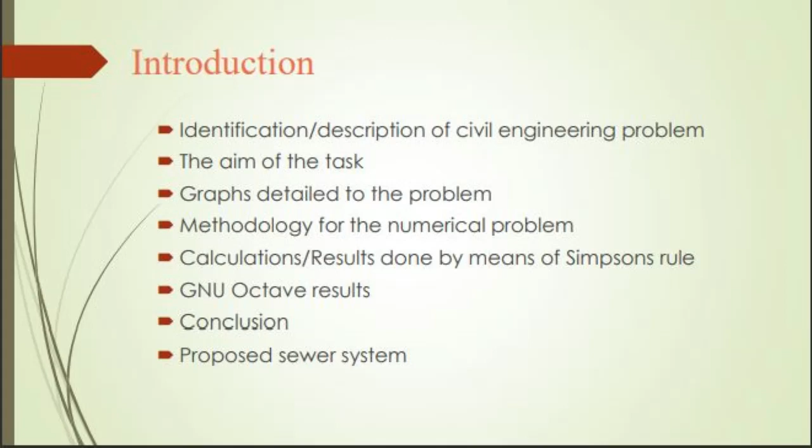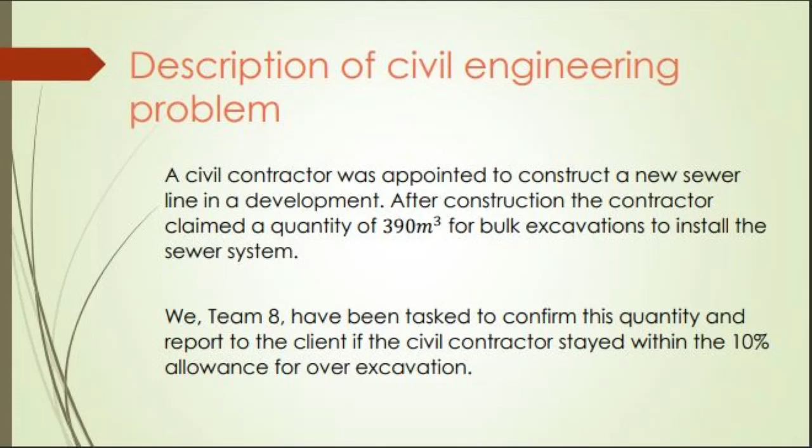The description of the civil engineering problem: a civil contractor was appointed to construct a new sewer line in the development. After construction, the contractor claimed a quantity of 390 for bulk excavation to install the sewer line. As Team 8, we have been tasked to confirm this quantity and report to the client if the contractor stayed within the 10% allowance for over excavation.

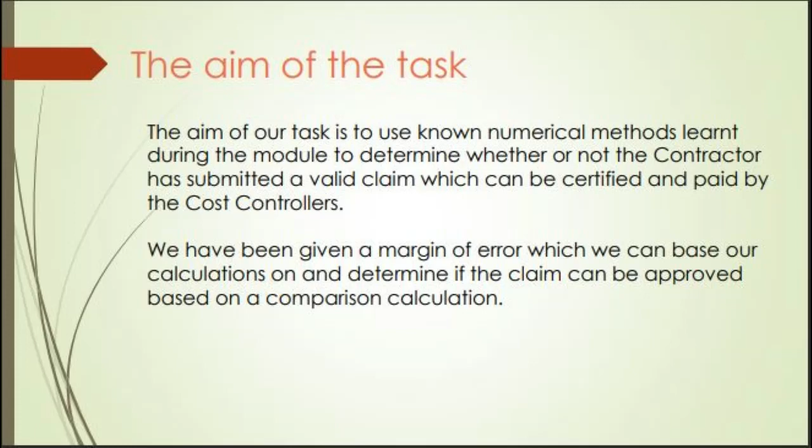This was known as Simpson's rule, used to obtain a slightly more accurate quantity of excavations, so 5-meter intervals were appropriate. The green line indicates the sewer invert level, laid at the minimum slope for adequate drainage, and the difference between the two shall be taken as the depth, used to calculate the area using Simpson's rule.

My contribution to the group was to design the sewer with the invert levels, to create a surface and obtain all the existing ground levels at each interval, to lay the pipe according to cover levels and pipe IDs, and to tie into the existing manhole invert level.

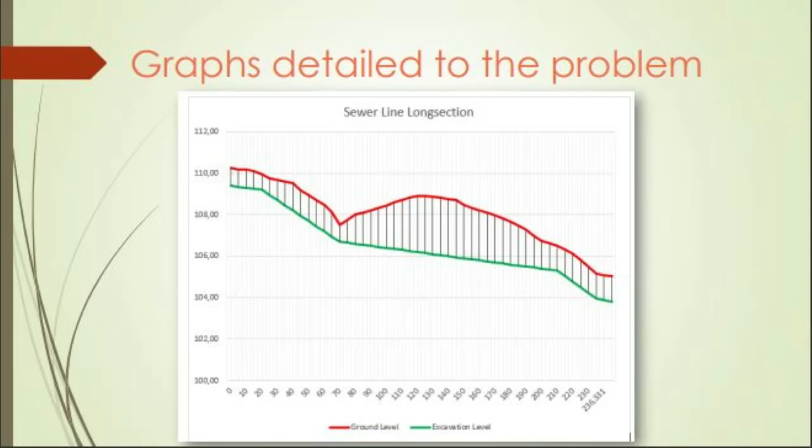This data was then used to obtain the depths, which I used to calculate Simpson's rule manually, and I also used an online tool to confirm all the answers. Using these answers, the area was multiplied by the trench width to obtain the total volume.

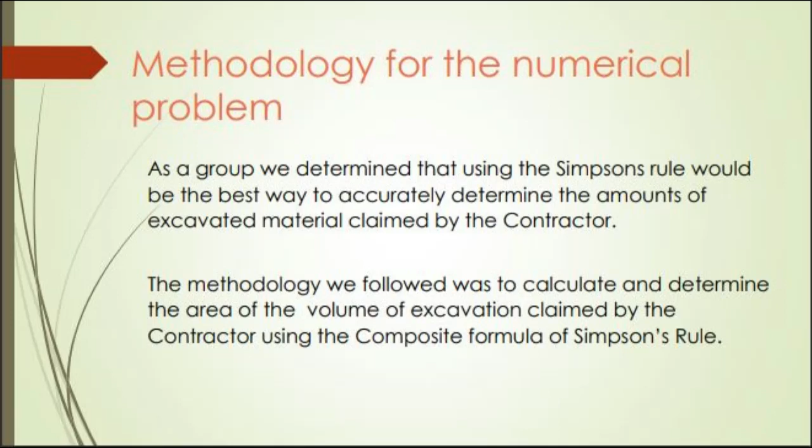We used Simpson's rule to calculate the excavated volume of 360.139, and this volume was calculated from chainage 0 to chainage 237.661. Compared to the contractor's claimed excavated volume of 390, this leaves a relative error of 8.29%. Even though the contractor's volume is higher than our calculated volume, the error is less than 10%. Therefore, the contractor can be paid out for the volume excavated.

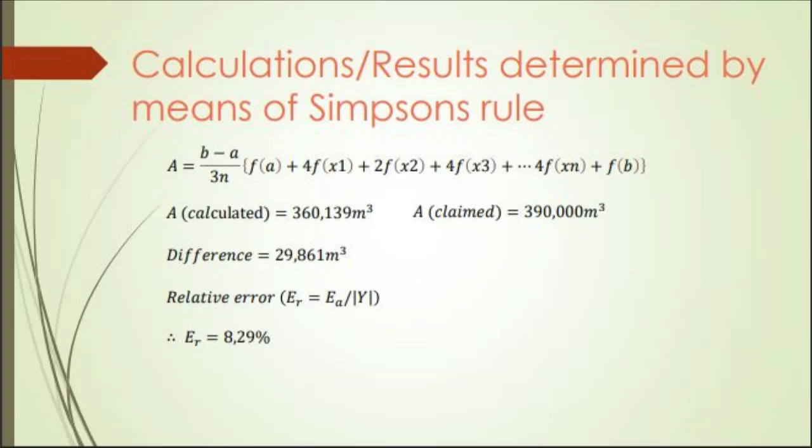That would conclude my portion of the presentation. Please allow Camille to explain the Octave programming required for task C.

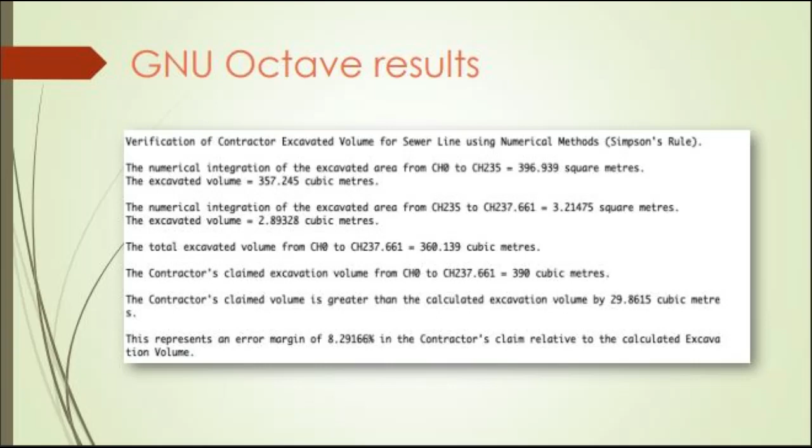Multiplying this total area by the trench width of 900 millimeters, we derived an excavated volume of approximately 360.14 cubic meters. Comparing this result to the contractor's claimed volume of 390 cubic meters, we determined the difference between the claimed volume and the calculated volume to be 29.86 cubic meters. This difference represents a margin of error of 8.29%.

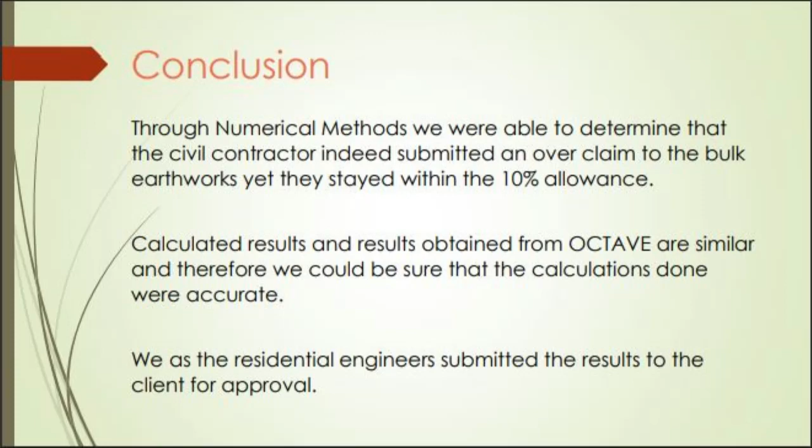As this margin of error is within the allowed margin of 10% for over-excavation as stipulated by the cost controller, we as Team 8 have assessed the contractor's claim to be within the allowed margin of error. As such, we would recommend to the cost controller that the claim can be paid as submitted.